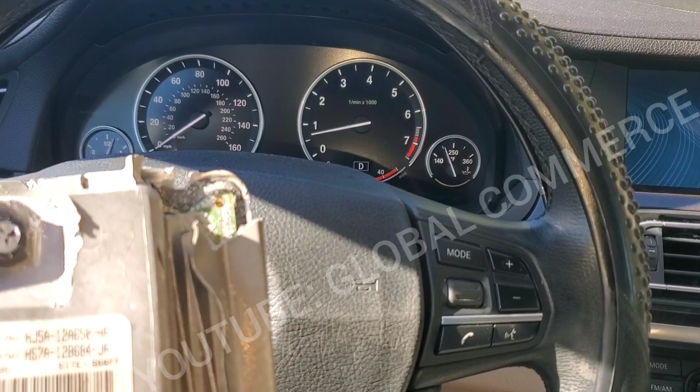All right guys, today we're going to use the FC-200 and try to clone a Ford Escape PCM. This one was totally creamed, as you can see. Not sure if we're actually going to be able to read any data off of this because of this damage, but we're going to try and see if we can recover the data from this PCM.

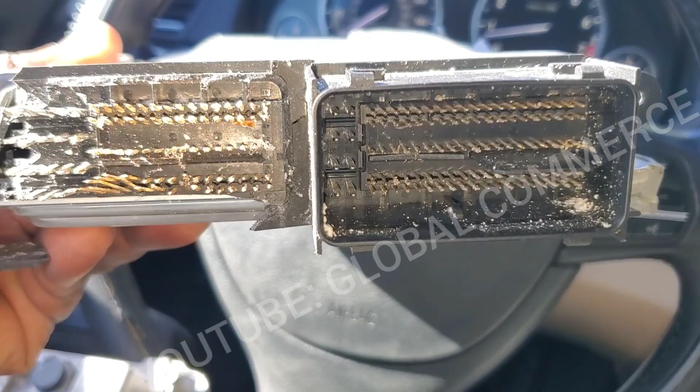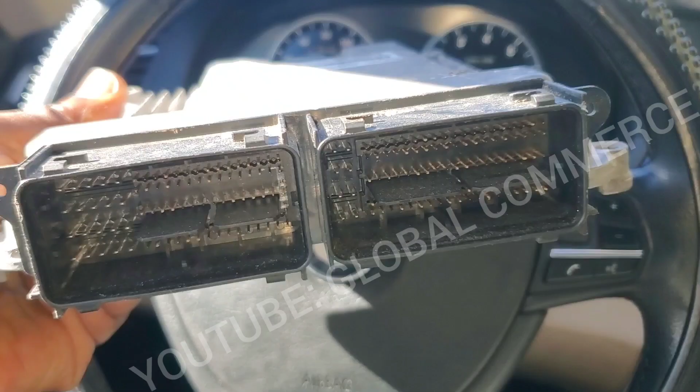There's the part number, and we've got our donor with the same part number. This is a '17 Focus 2.0 turbo, same platform as the ST. So we're going to see you back at the FC-200 when we hook up.

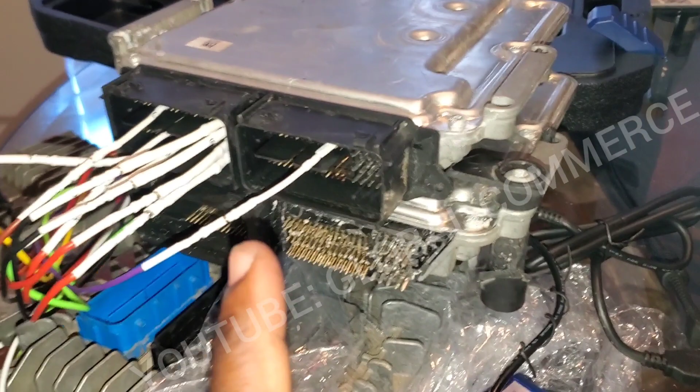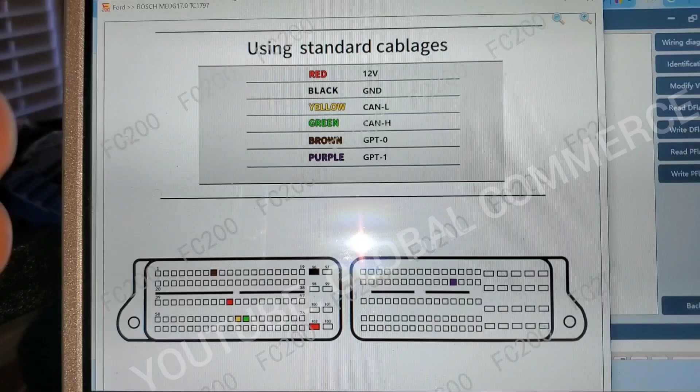All right guys, so back on the bench. I've got the new PCM, or the replacement, hooked up according to this, and I'm unable to communicate. So that could mean a couple of things. Could be this is not exactly correct for this PCM, or it could be that it cannot read this PCM, or it could be a couple other things. It could even be this is defective. I don't know, I haven't tested it.

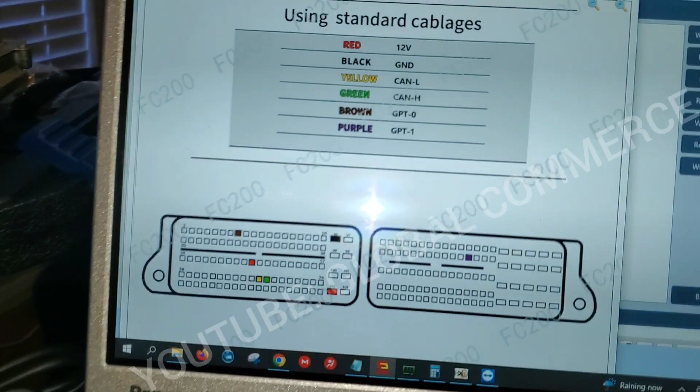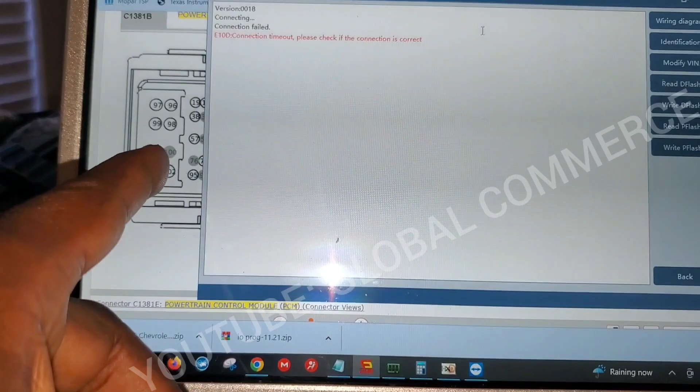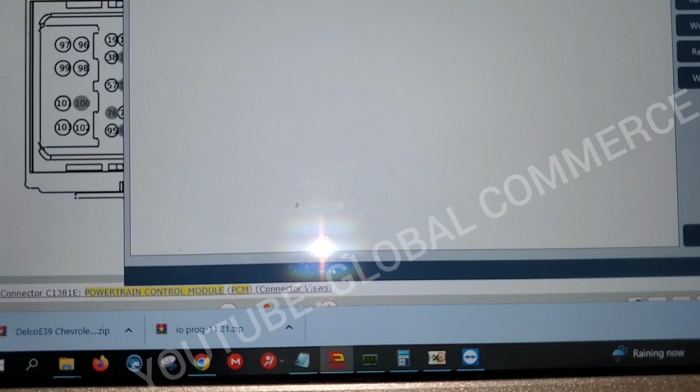So what I'm going to go ahead and do is connect up the old one, and I had the same response. I was unable to connect with the FC-200 to communicate with it or identify it. I double-checked my wiring diagram, and all the pinouts for the powers and grounds are correct, and the CAN, these are of course unlisted, the brown and the purple, so I can't really verify that one. Either way, it's unable to communicate.

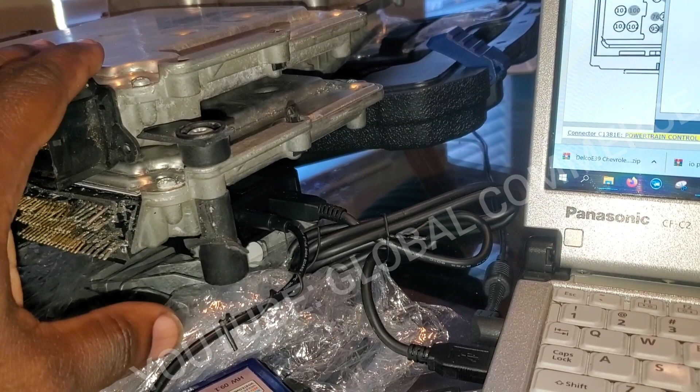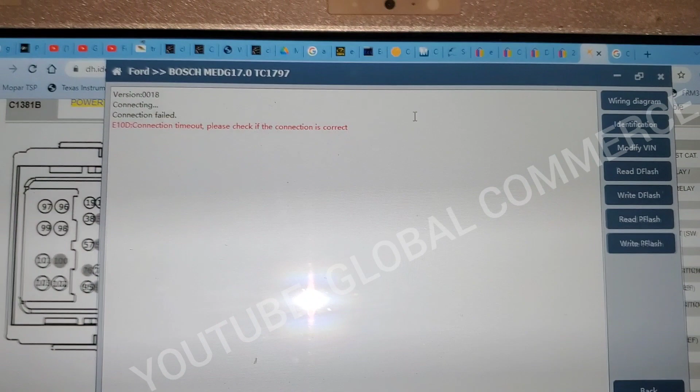So I'm going to put this on the bench and connect with it directly through my breakout box and a scanner, and see if I can communicate with it. If I can communicate with it, I should be able to then just put this onto the network, and the FC-200 should be able to at least identify it. Once it can identify it, it should be able to read it. So I'm going to come back after I try that.

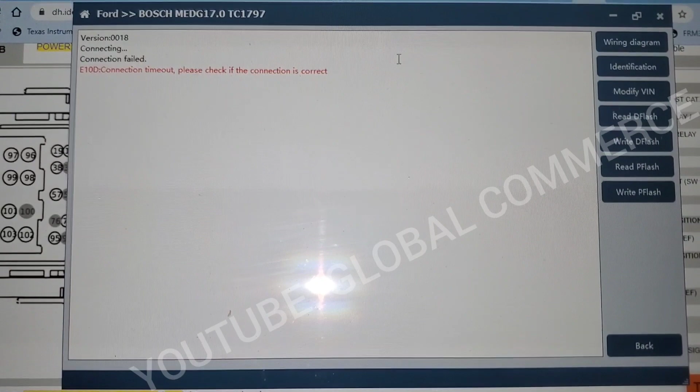Hopefully on the bench I can identify it on the breakout box, or I can communicate with it. Once I can communicate with it, I'm pretty sure I'll be able to clone it, which would mean that the powers and grounds that they listed are insufficient, most likely, but we got to see. I also added an extra power and ground just in case, but it still didn't work. So we'll be back on the breakout box.

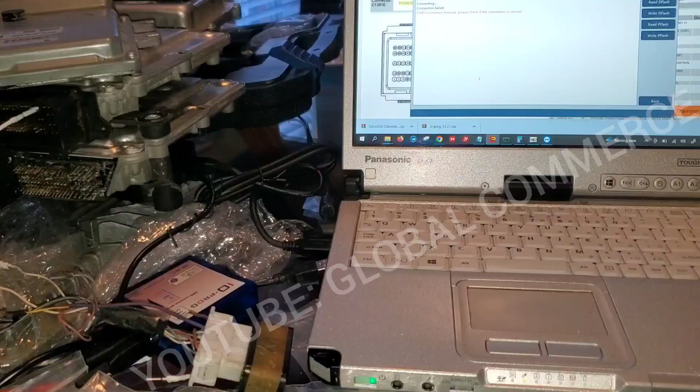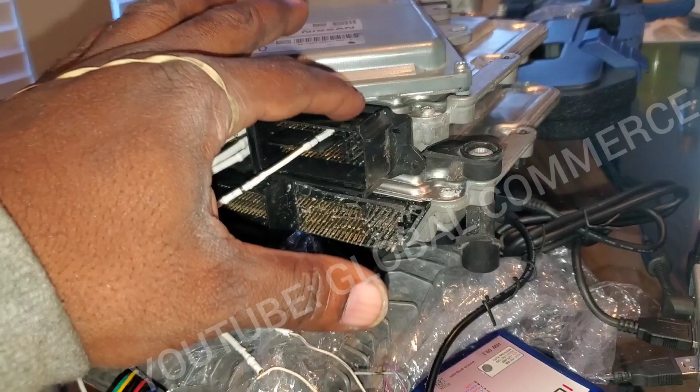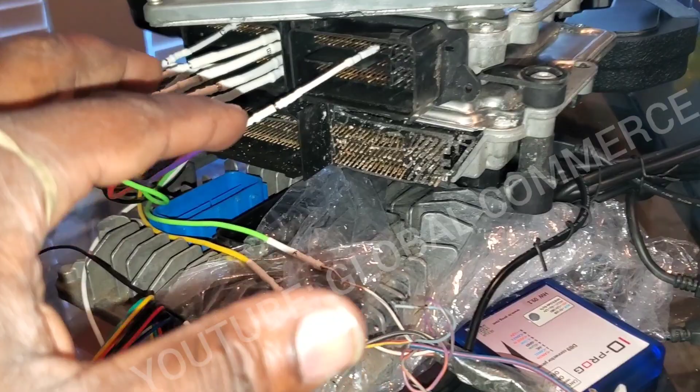Hey guys, so what I went ahead and did before I pulled this all out to put on the breakout box, I just connected up with my setup - if you've seen my other videos, you know what this is - and I connected my scanner into CAN high and CAN low, and I am able to communicate with this PCM. So I'm going to try to replicate it on the damaged one and see if I can communicate with that one. So this pinout is correct, except for these two ports I cannot verify, but that's what it's listed as.

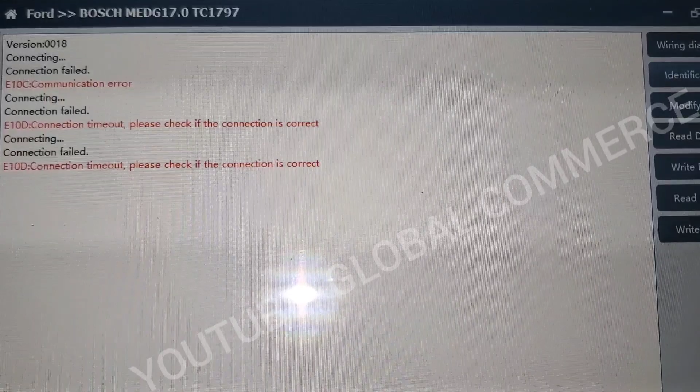But the program, the FC-200, still has problems communicating with this PCM. So I've got to do a little bit more digging, see what's going on here. Yeah, so I'll update you guys in a bit.

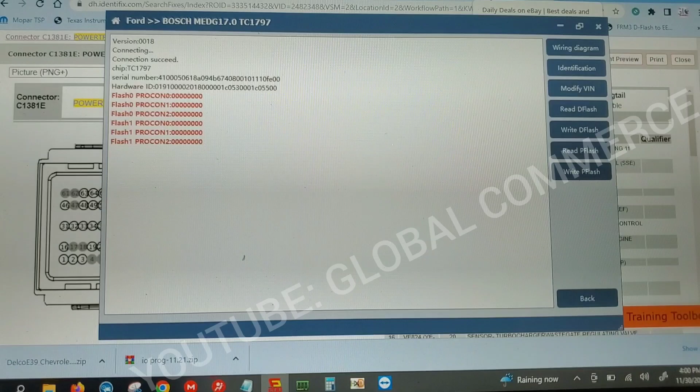All right man, I feel like a total tool, man. I double-checked, triple-checked, quadruple-checked. And here's what happened - everything was right, except for some reason, I don't know how, I had this purple one into the third slot instead of the fourth slot. I don't know how that's possible. I checked and checked and checked. Everything was right except for that.

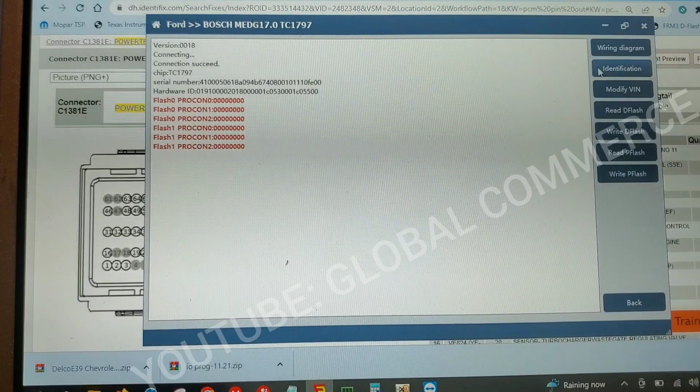So now when I do identification, I just unplugged and replugged everything. Identification. And there it is - so I can read the flash and everything.

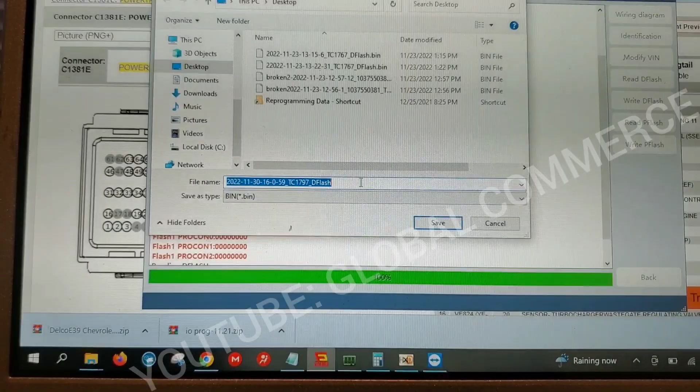Let's go to modify VIN, see if it gives us that option, if it works. Under this one it's probably going to let me save the D flash. Yep, I'm going to call this - let's see - 17 donor PCM. Save. Yes, so I can modify the VIN.

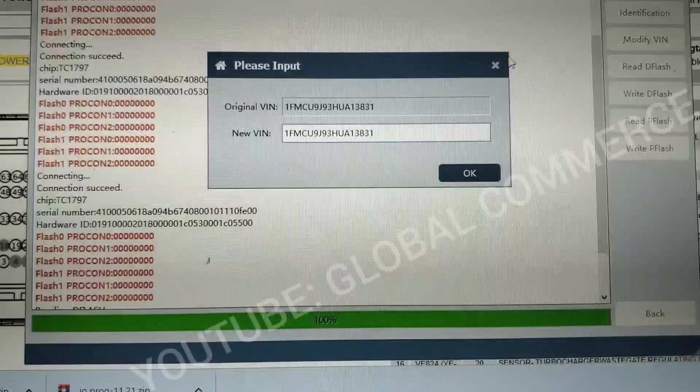All right, I'm going to change that later. Cancel. Oh, I just got to hit OK. So there's no changes there.

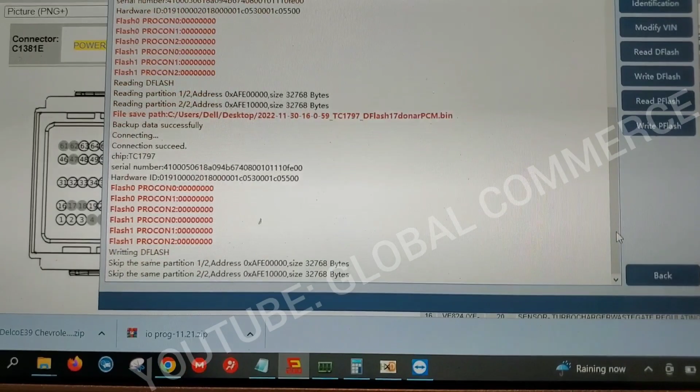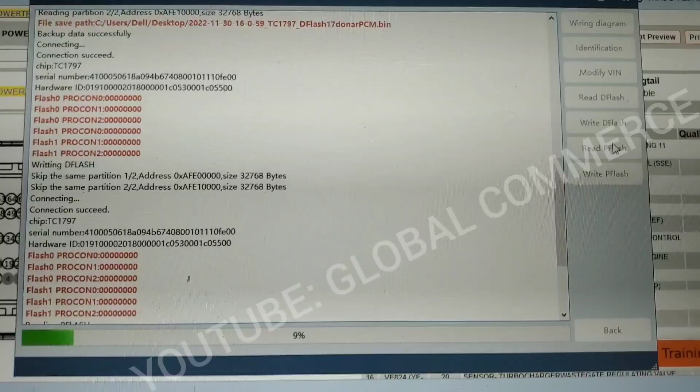All right, so let's read the P flash. So reading the P flash. Sorry guys, this video ended up being longer than it should be. I goofed up on this one, but we got it going. I'll come back to you in a second.

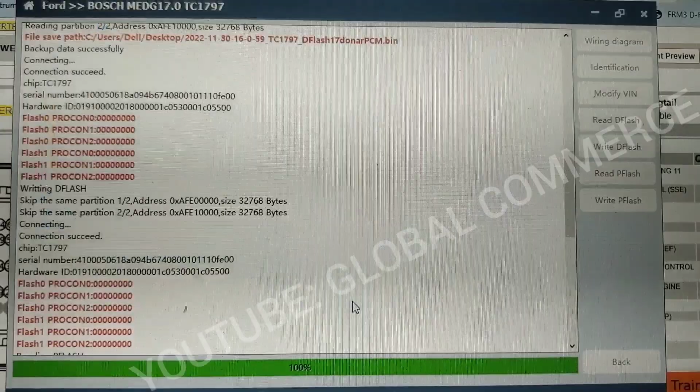Guys, so just finished the PCM, so I'm just going to save it as donor PCM - sorry, the P flash. Save. So I'm thinking two plans of attack.

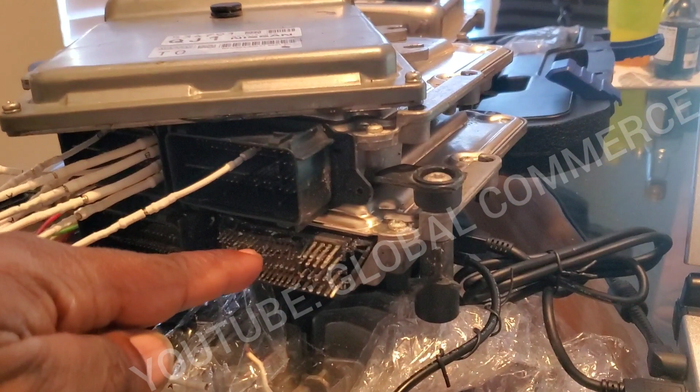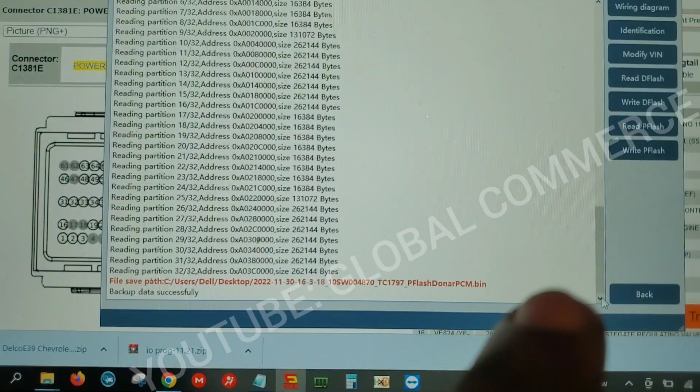I can just change - not plugged in, yeah - so basically here's the two plans of attack I was going to implement. One, I can try again and read the damaged one and see if I can do a one-to-one clone and see if the car will just start, which I'm not so hopeful for this thing. Two, I can just change the VIN number and then program the security portion, and being that this is exactly the same build out, same engine, everything, it should actually start just fine and have the correct VIN number.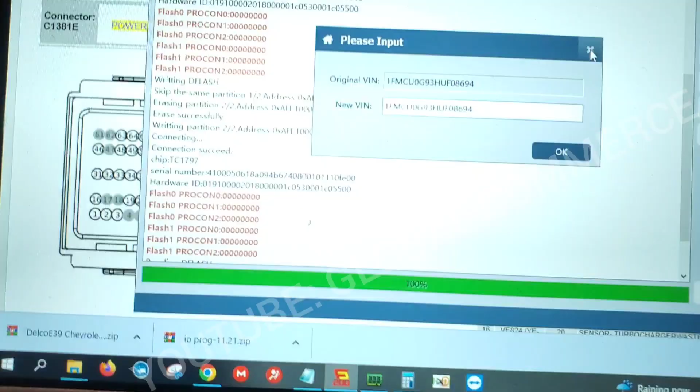So I'm going to connect now to the broken one and see if there's a way to read this thing. Nope guys, this one is definitely dead. One thing I noticed that was strange - I only had this one hooked up, and I hooked up this power, and I got a spark contact as if I also had a ground. So that kind of tells me something in there is being shorted out. So this one's a no-go.

Cannot read, so I'm just going to do the VIN change like I did, and I'll be back at the car. All right guys, I'm going to have to make a part 2. It's getting a little bit long, and I just came from looking at the car, and there's actually a lot of wiring damage on that car, so I will not just be able to connect it and finish programming like I expected. So look out for part 2, and let's see the next steps in terminating and finishing this programming.